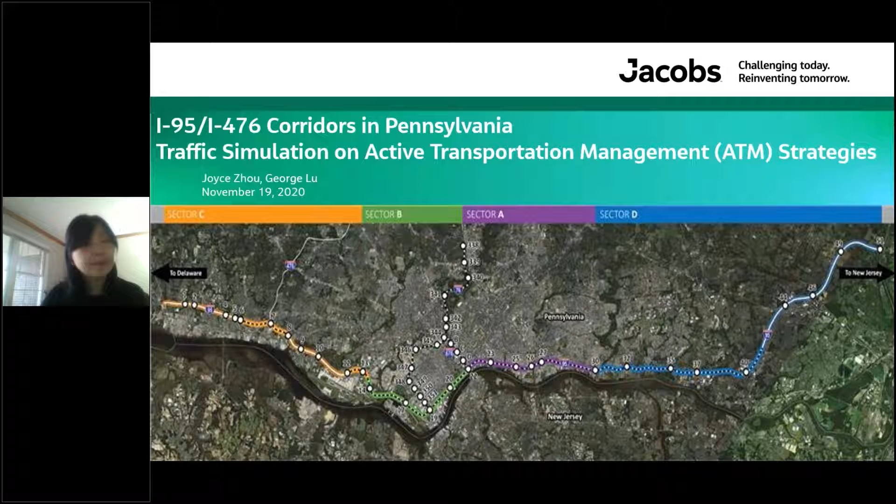Okay, here is the presentation agenda. First is an introduction on active traffic management and the project. And then I will talk about the methodology to develop the base models and simulate the impacts of the ATM strategy on the traffic operation. At the end, I will summarize the findings from the analysis.

In Pennsylvania, a good portion of the I-95 corridor runs through the developed urban area where the right-of-way is limited. This makes constructing new lanes or roadways no longer a sustainable strategy considering the relatively high economic cost and the environmental concerns. Meanwhile, previous studies show in reality traffic conditions in the study area are rarely typical due to special events, weather, crashes, and other incidents, or some combination. In this case, new road construction is not a cost-efficient way to solve the congestion.

On the other hand, ATM, active transportation management, can dynamically manage both recurrent and non-recurrent congestion based on prevailing traffic conditions. ATM helps preserve and improve the performance of the transportation network by getting more use out of the current infrastructure. Implementing ATM strategies is generally the most cost-effective for those roadway segments where there is either persistent recurrent congestion or variable demand.

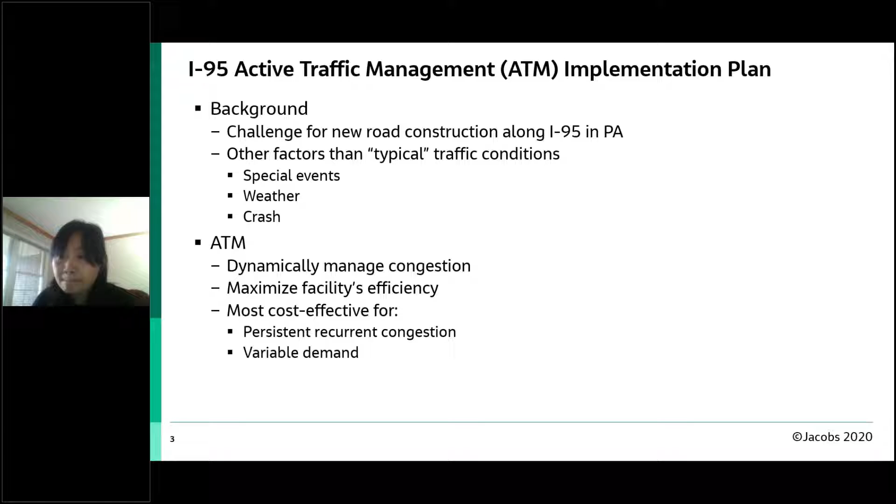Here are some widely deployed ATM strategies. Ramp metering deploys traffic signals at on-ramps to dynamically control the rate of vehicles entering a freeway vicinity, which could smooth the mainline flows. Hard shoulder running uses the shoulder lanes as a travel lane based on congestion levels during peak period or in response to incidents. This strategy can temporarily provide additional capacity.

Dynamic speed limits and lane assignment are usually implemented in conjunction with hard shoulder running, providing advanced warning of the lane opening or closure, and informing the drivers of the upcoming speed fluctuated segment. Queue warning is a real-time display of warning messages to alert drivers that queues or significant slowdowns are ahead. It also may be included as part of the dynamic speed limit strategy.

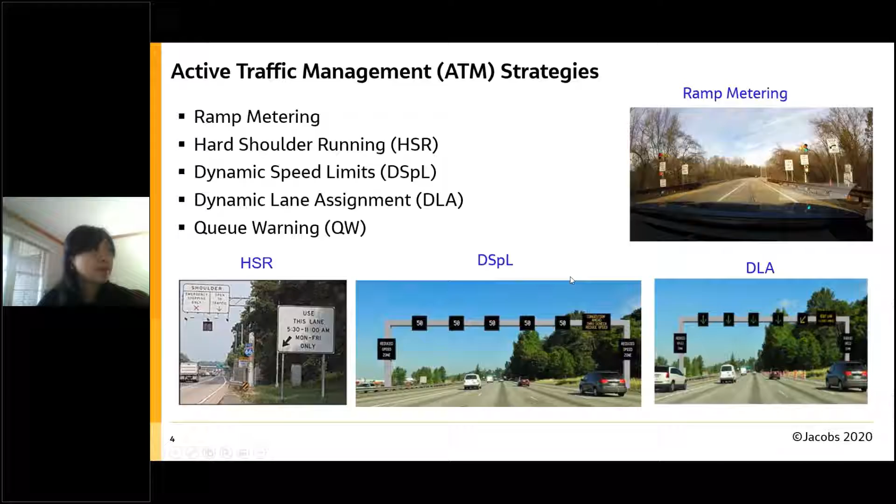Our project aims to evaluate the specific ATM influence on traffic operation along I-95 in Pennsylvania. Due to the long corridor, the whole study area is divided into 4 sectors, and the first part of the analysis focuses on Sector C, as the figure shows. It's the southmost part of the I-95 corridor in Pennsylvania. It's a 15-mile long segment consisting of 13 interchanges and 28 adjacent intersections.

Other than the I-95 corridor, this sector also contains a major branch, I-476, which ends at the system interchange, and a major local arterial, PA-291, as the purple color shows. It is an important local alternative route within this area. According to the long-term transportation planning, the proposed ATM strategy should be eventually implemented before 2045. So in this study, the existing year for analysis is 2019, when the field data was collected, and the design year is 2045.

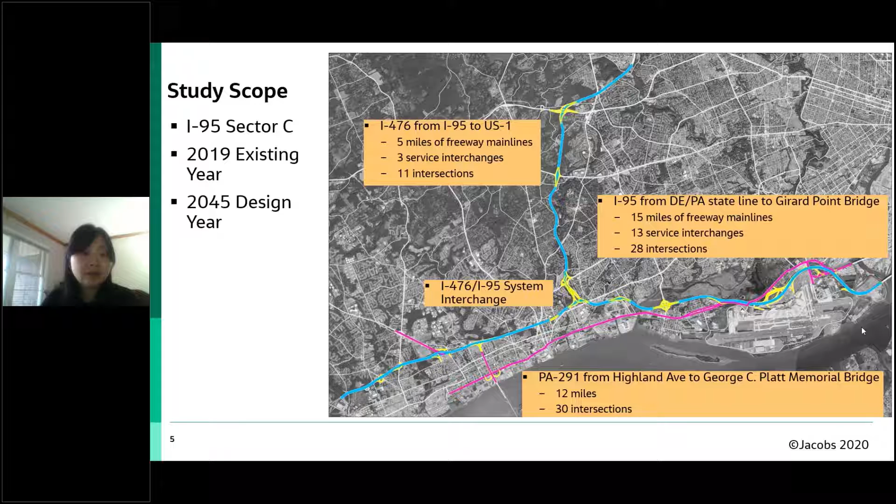This flowchart shows how the existing VISSIM model is developed and calibrated. The peak hour volumes are determined based on the field data, including the mainline counts, ramp counts, and the intersection turning movements. After the balanced peak hour volume set was developed, the VISUM network was used to generate the origin and destination pattern and the corresponding routes within the study area.

As a starting point, the OD tables from the DVRPC travel demand model were adjusted using the VISUM tool TFlowFuzzy to match the traffic assignment to the field traffic and get the new estimated OD tables. This information was fed into the VISSIM model for calibration. Additional demand adjustments may be required as a result of the calibration process.

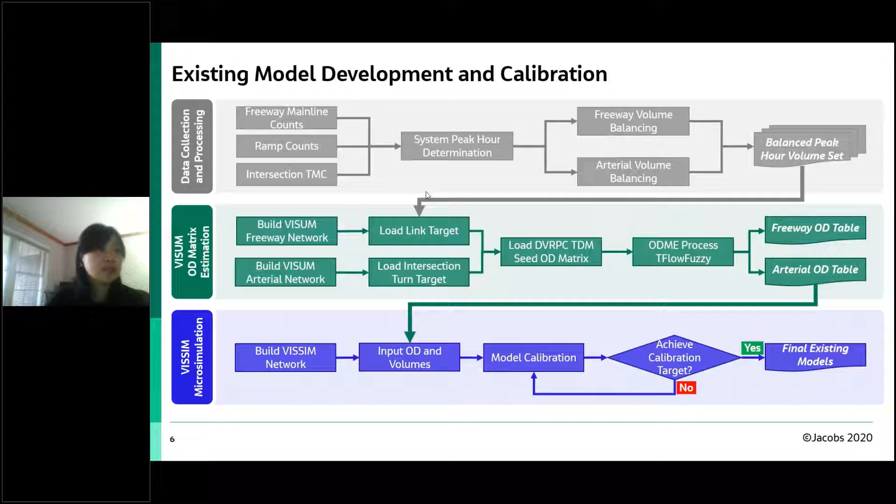The development of the 2045 future models is similar, except for two major differences. The future peak hour volumes are calculated based on existing volumes and the regional annual growth rate, which is derived from the existing TDM model and future TDM. Secondly, instead of using the TDM OD table, the existing OD matrix is used as the seed table to estimate the future OD matrices in VISUM.

The existing traffic data was collected from the field counts, INRIX, and other resources in 2019. The data shows within the study area, the morning peak period is from 6:30 to 9:30, and the peak hour happened between 7:30 and 8:30. The model will simulate the whole 3-hour peak period, plus 30 minutes seeding time.

In the morning, there are 3 major bottlenecks as shown in this figure. The first one is the merge area of US 1 on-ramp to I-476 northbound, which causes the significant congestion. The queue extends almost the whole northbound corridor until the system interchange. And on the southbound, it's similar. The US 1 on-ramp merge area makes the traffic slow down here.

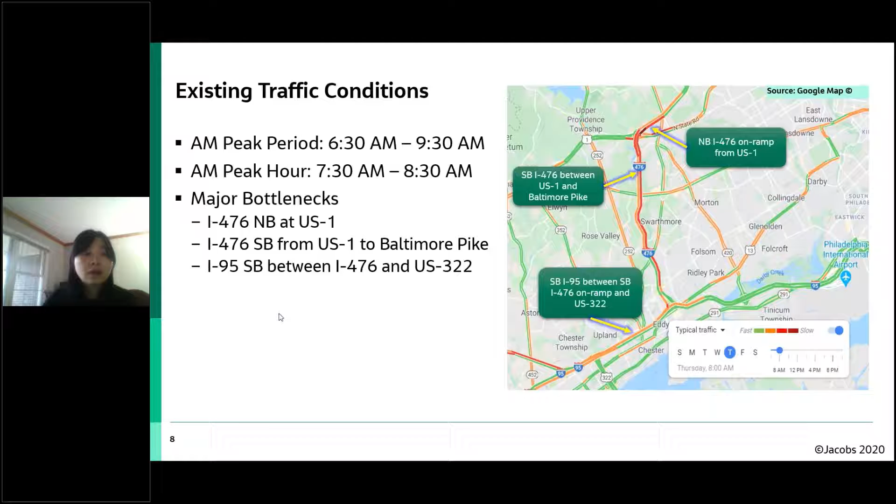As mentioned before, because of the right-of-way limit, it's not feasible to construct new lanes to mitigate the congestion. PennDOT has put a lot of effort into deploying ramp metering at the on-ramps along I-476 through the 3 interchanges, US 1, Baltimore Pike, and MacDade Boulevard. All the ramp meters are dual lane, allowing 2 cars through per green time. They can be coded in Vissim by using the traffic-dependent VAP programming.

Here is a simulation video. The ramp metering does control the flow rate entering the main line, like the video shows. However, due to the high demand along the whole corridor, we can still see the bottlenecks at the merge area, and the traffic slows down after that.

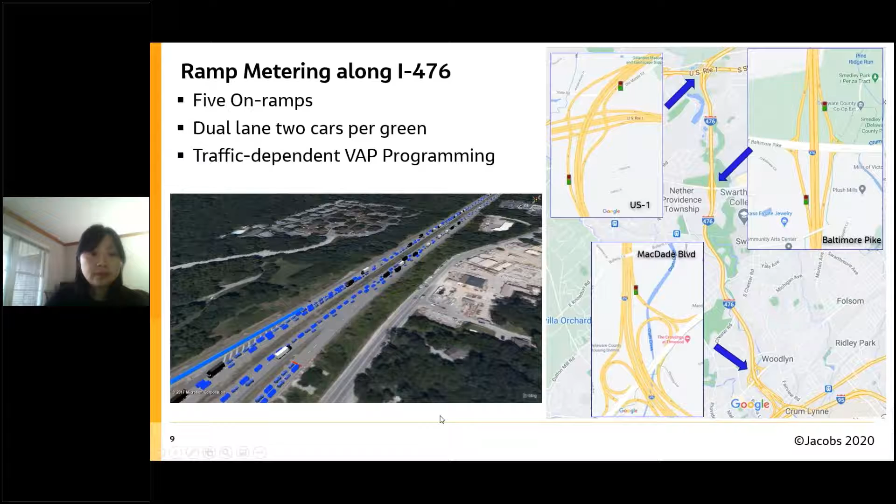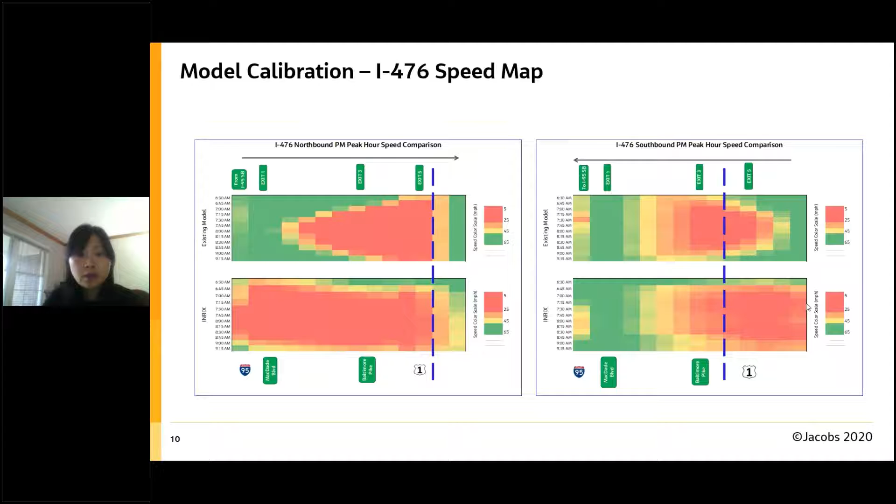The existing model simulation results also show the congestion conditions. Here is I-476 northbound. The bottleneck is at US 1, with a long queue behind it. And this is southbound. The whole segment between Baltimore Pike and US 1 is bad. That's the congestion area.

In addition to the longer queue, a new bottleneck appears at the system interchange because the traffic from I-476 southbound to I-95 southbound exceeds the on-ramp capacity. In this case, another ATM strategy, hard shoulder running, is considered. The left side shoulders along I-476 are proposed as travel lanes during the peak period in both directions from MacDade Boulevard to north of US 1.

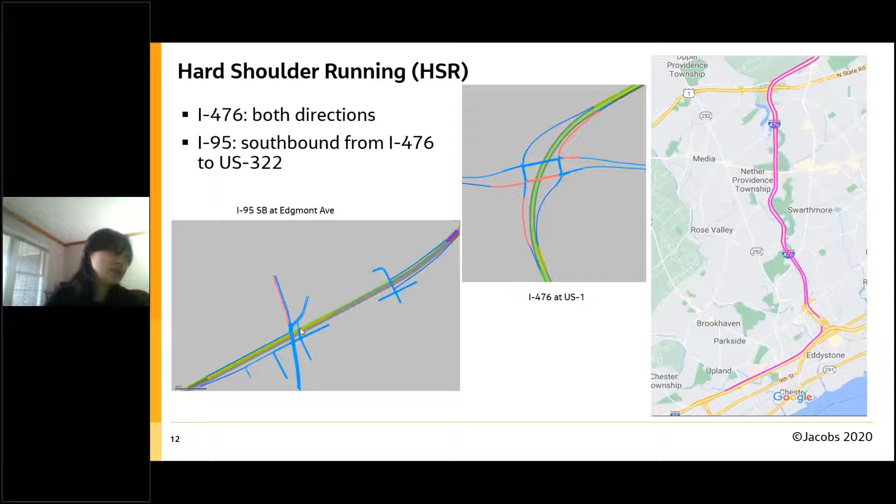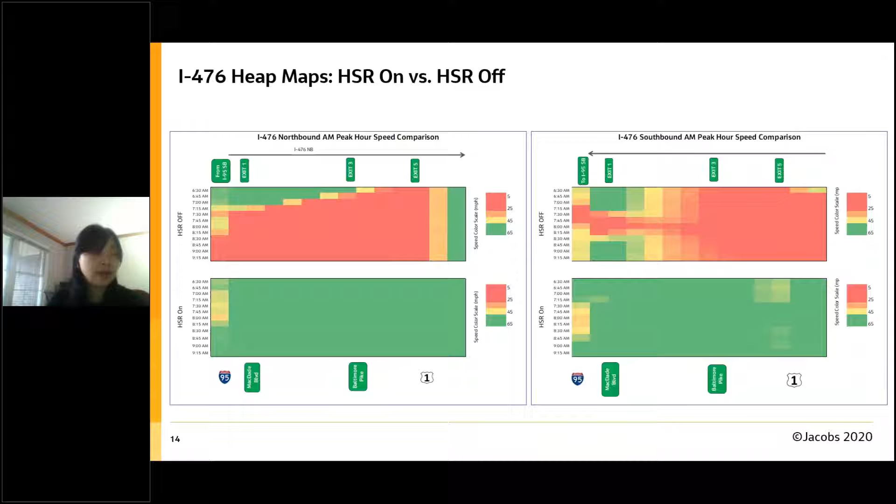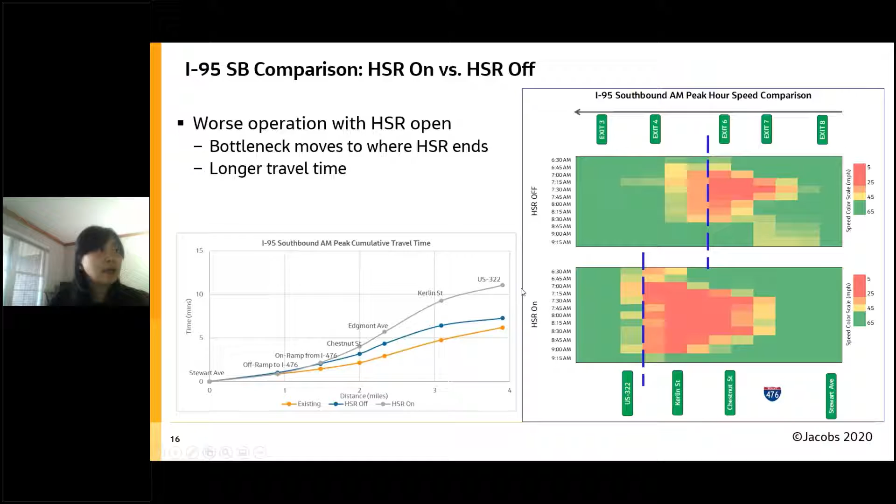In addition, the time span that the congestion continues becomes longer as well. It starts from the simulation beginning and lasts almost the whole peak period. So the new bottleneck is located where the hard shoulder running ends, as this figure shows. The hard shoulder ends here. And the major reason is the downstream road cannot accommodate the higher demand.

And so the analysis result shows simply implementing hard shoulder running does not necessarily mitigate the congestion. The opening of shoulder lanes would attract additional demand, which could be accommodated by the increased capacity on the hard shoulder running segment. However, if there is no capacity constraint after the hard shoulder running ends, the traffic operation could be significantly improved, like the performance along I-476. But once the downstream road capacity cannot accommodate the additional induced demand, the hard shoulder running may create new congestion at the potential bottleneck location.

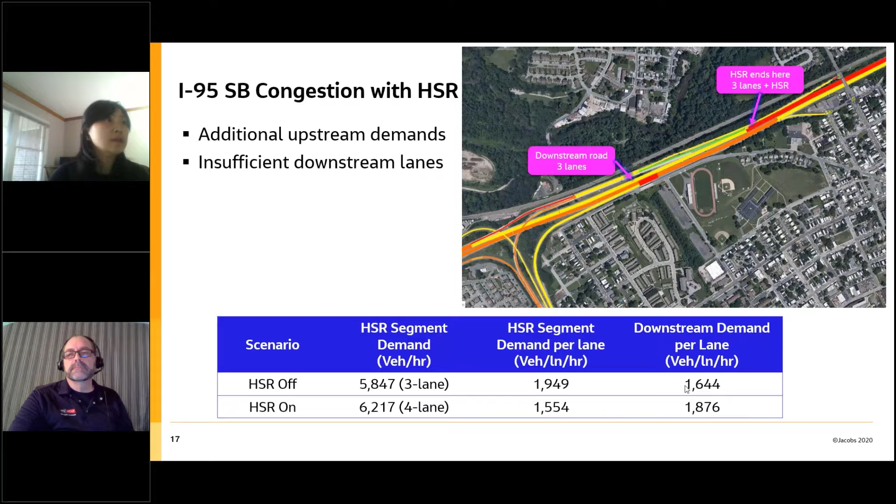One factor could be the merge area downstream. In the existing condition, this downstream is also a slowdown area because of the merge area and the diverge area. It's a high density segment with the merge and the diverge. But the operation is not very bad. It's kind of slowed down.

So after we open the hard shoulder running upstream, a little bit more demand, more traffic, flushes down to the downstream area. So that makes the current slowdown situation a lot worse. So that's why the new bottleneck was created.